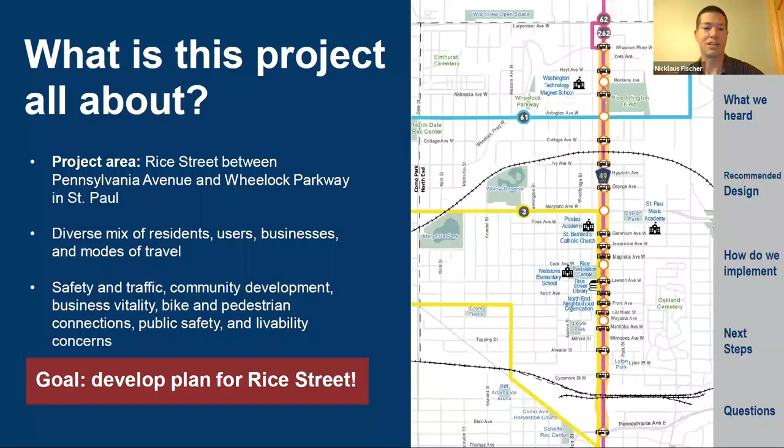So we have lots of other goals: public safety, improve bicycle safety, promote community investment, promote healthy community, maintain transit service - both existing transit service and plan for a future BRT, bus rapid transit out here - provide business support, enhance pedestrian safety, create an inviting environment, promote economic development, workforce development, and improve vehicle safety.

So our project timeline - what's been happening? We've had lots of public engagement over the last few years. Tonight we're kind of wrapping up our preliminary design, trying to get towards the end of that. Our next step is to come up with an implementation plan - how are we going to build it, when are we going to build it - and start final design in 2022 and beyond.

And I'll pass this off to Haila to talk about what we've heard. Thanks, Nick. Again, I'm Haila Maze with Bolton and Menk. I'll be covering the engagement section.

As mentioned earlier, extensive engagement has been an important part of this process. We're all glad to hear from you today because this process has been ongoing for some time, and it's not anywhere near done yet in terms of the conversations. My job today is to tell you what we've heard so far, what we've been doing so far, and how we're looking ahead.

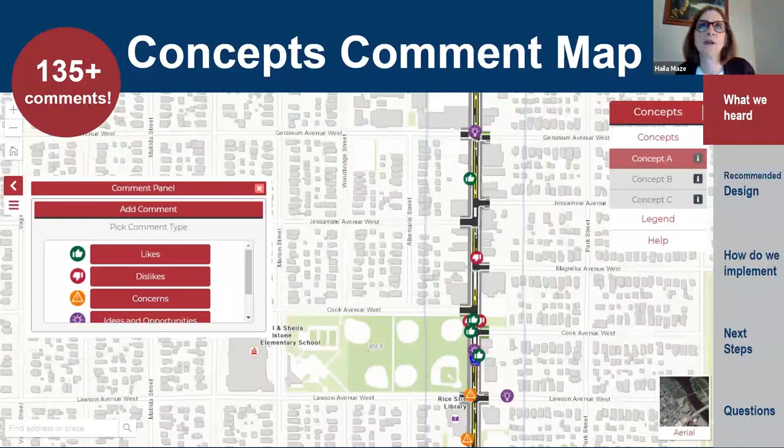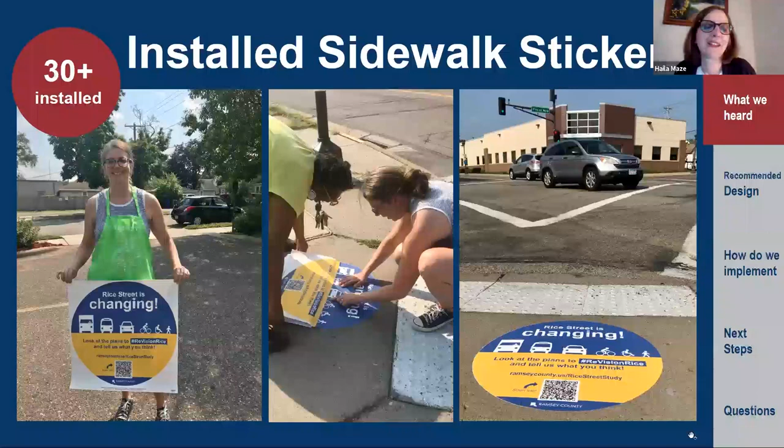We've heard over and over from many different people the importance of high priority pedestrian and traffic safety. People have a difficult time crossing this road, either by vehicle and especially on foot, and are concerned about others doing the same, especially children in this area. That is a priority, and we recognize it as such—it already was a priority. It's even more so after talking to people who have to navigate this road every day and feel unsafe doing so.

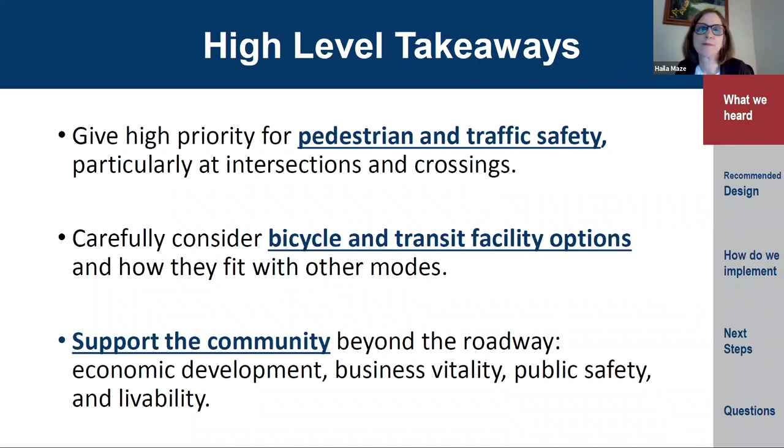Next slide. Just mentioning this to reiterate, as we're transitioning to the next stage which Scott will talk through, is how this informs the project. You'll see, as we hear about the concepts, how pedestrian and traffic safety improvements have been integrated throughout in a lot of different ways—reconfiguration of the roadway in terms of lanes and space, enhanced crossings including some restrictions to make it safer for people to walk and bike across, and bike and transit options and enhancements, including dedicated bike facilities and improvements to transit.

One great addition that happened midway through our process is that the BRT, the G-Line project for Metro Transit, was announced for this corridor. It's on a little bit different time frame, and this isn't replacing the project that will follow, but it certainly gave us an opportunity to start folding in conversations around that and around people's aspirations for improved transit here, and community support in general. We heard a lot about implementation and partnership approach beyond the roadway, and have had a lot of parallel conversations since then with key stakeholder agencies and community organizations who care about these issues.

Again, we're not here to be the solution for public safety and livability in the community in general. But we recognize that if we're not talking about that and not being authentic about it, we don't fully understand where the community is either. And that goes for many topics.

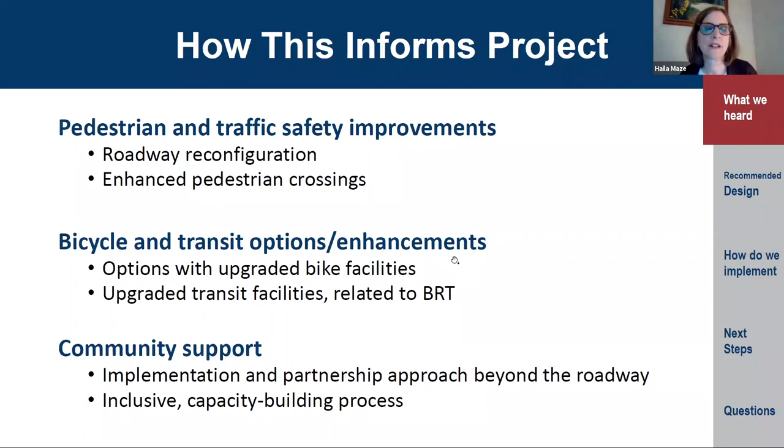But as Haila was mentioning, we're bringing along community context goals—things we heard from the community. How do the various concepts affect economic development and business support? How are the people who live around here and want to be employed affected by this project? So, development of workforce and employment, the health of the community—are we providing a safe, healthy environment for people to work and live in? And then, as Haila mentioned, the public safety element—it's not just about traffic safety, but public safety holistically. There are also some community-defined goals we heard from you all throughout this process that we're weighing these concepts against. So, next slide.

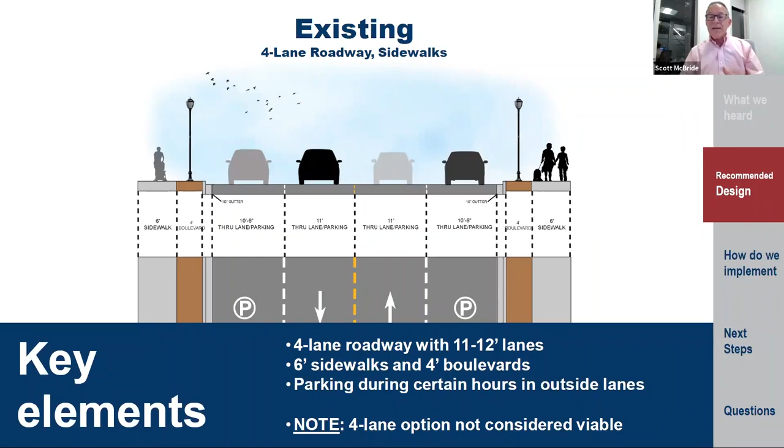The important thing to take away from the existing conditions is that as we analyzed safety, traffic, and a number of factors—due in large part to the crash history out here—we do not think a 4-lane undivided roadway like this is a viable option. So when you look at the 3 alternatives we brought out to the public in July, none of them have this 4-lane design. If you'll turn to the next one, Nicole...

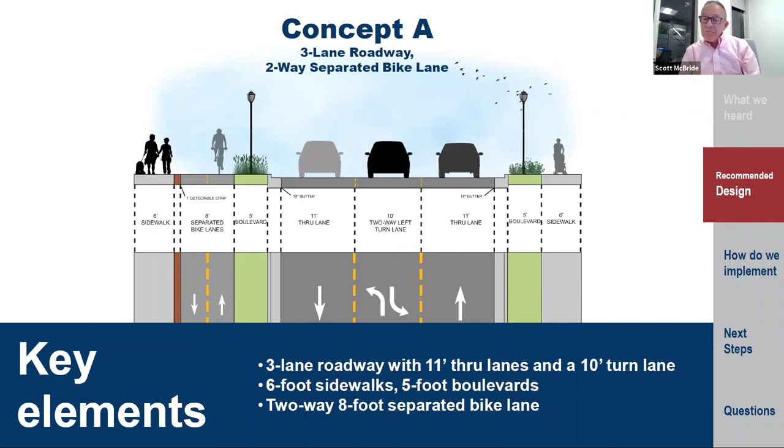This concept B is also a bikeway alternative. Starting on the left side, there's a 12-foot shared use path. So it's not the separated bike facility that you saw before - it's a shared use path available to pedestrians and bicyclists alike. And again, it's the same roadway width, a three lane section in the roadway.

On this one, we're able to get a slightly wider boulevard or flex zone area on the west side, 6 feet. On the east side, we're able to get a bit more as well - a 6-foot boulevard and a 6-foot sidewalk, for 12 feet of total width there. I don't want to be a spoiler, but this is the option we're looking at - I'll dwell on that a little bit later.

Concept C was considered more of a pedestrian alternative, so there is no bike lane on this alternative. It's pretty symmetrical with a 7-foot boulevard, a little bit extra boulevard, and an 8-foot sidewalk - 15 feet of total space on both sides of the road. The sidewalks are allowed to become a little bit wider in that alternative.

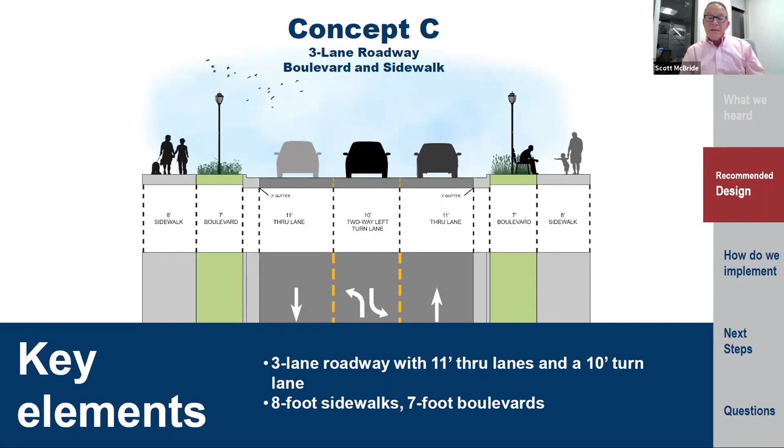Let's talk about our preferred recommended concept, and that is concept B. It is a bikeway alternative, and I'll get to some of the whys on why we chose this in a minute. But first, I thought it'd be good to remind you, and then take a closer look at what this looks and feels like.

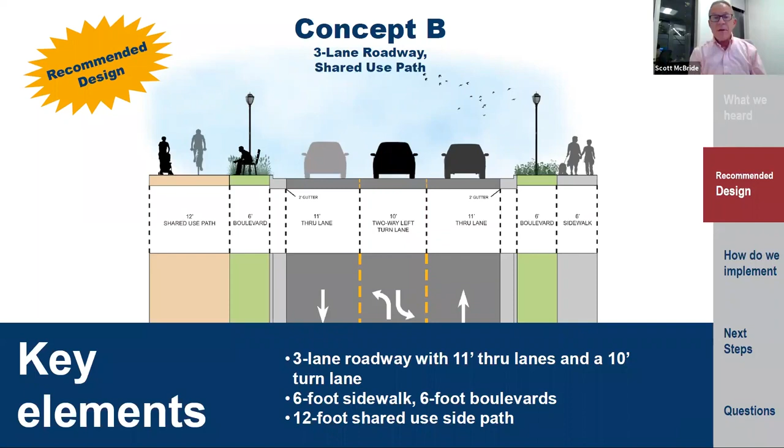Again, this is a 12-foot shared use path with a 6-foot boulevard on the west side, or left side you're seeing there, and a 6-foot boulevard and a 6-foot sidewalk for a total of 12 feet on the east side of the roadway. The shared use path is again available for pedestrians and bicycles to ride on.

Now let's talk a little bit about what this feels like. What I'm going to show you now is just a handful of really draft artist renderings. I will say that we are at about 5% design right now, so many decisions are yet to be made. We don't want to say that any of this is set in stone yet, because it's not.

We're looking for feedback from our constituents, from all of you out there, and that's really important to inform this process. So what I'm going to do is walk through a couple of spots here and show you different kinds of treatments that we can put out here, and some that we're suggesting be put out here.

So in this rendering, you see the observation point there. We're between Hyacinth and Ivy, looking north toward Ivy, and you can see some of the features on there, the New Horizon Academy and the Hmong Elders Center.

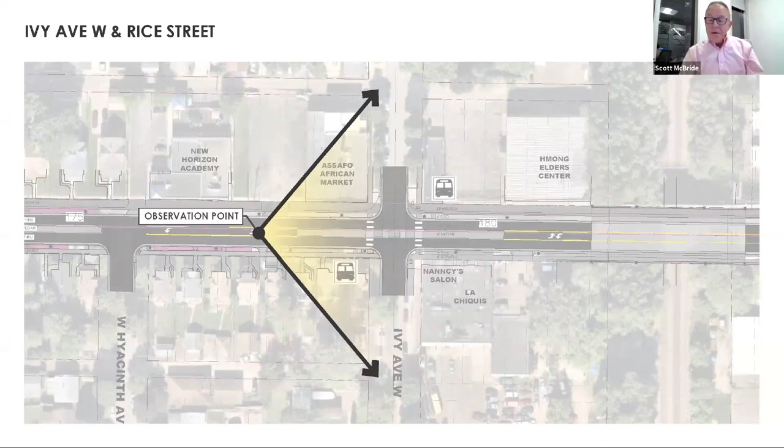If you go to the rendering, what this is showing is an example - that's a great question from Kim O'Brien, I just saw that pop up.

This is an example of where we would turn that center turn lane into a median for various reasons. At Ivy Street here, we're actually showing that median going all the way through Ivy Street, so Ivy would become a right-in, right-out situation.

You could not cross at Ivy. What the median does is a couple of things. One, it helps to slow traffic, having the median in there. And two, it creates a crossing opportunity for pedestrians, where they only have to cross one lane of traffic at a time, have refuge in the middle, and then look the other way and cross the other way. So this is an example of how we can take a median through a street and create a right in, right out situation on Ivy.

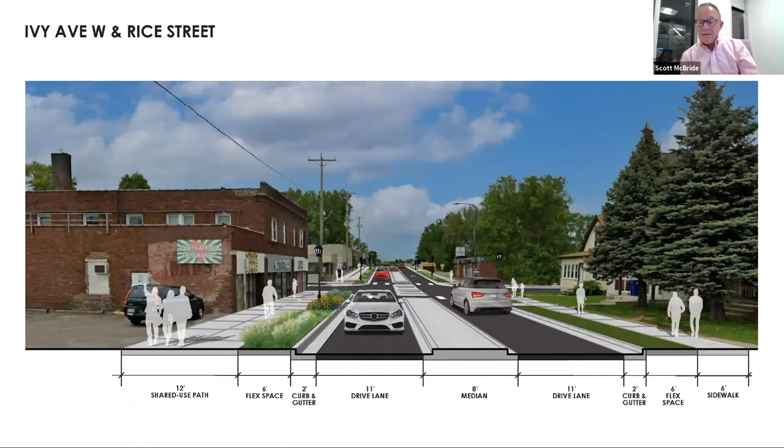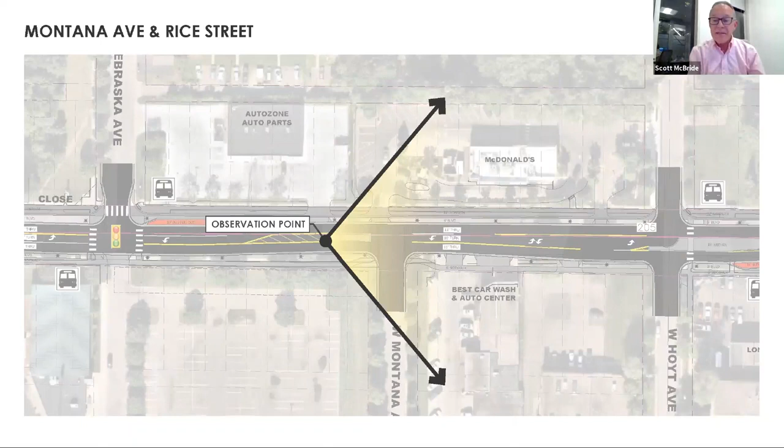Next. So this one is looking at Montana. We're right between Nebraska and Montana, closer to Montana, looking to the north where the McDonald's is. This is an example of a partial median, a pedestrian refuge median. We still show the left turn lane in the southbound direction, that'll get you to Nebraska, and you are able to come in and out of Nebraska there. But there is an island there that allows a pedestrian to come across and have refuge. So it's an example of a pedestrian median that we'll have sprinkled throughout this layout.

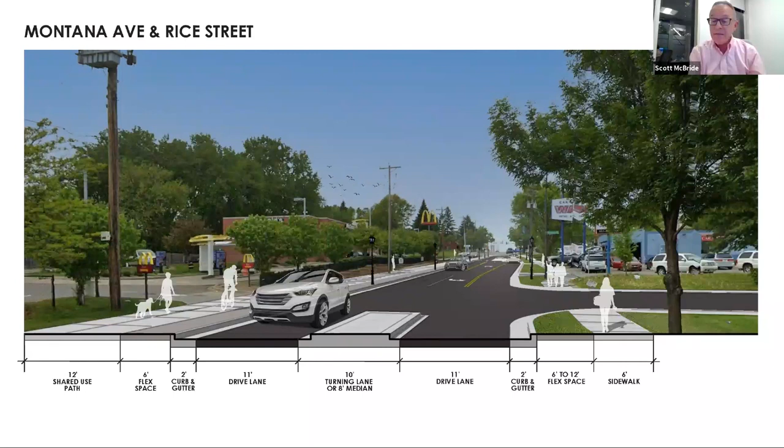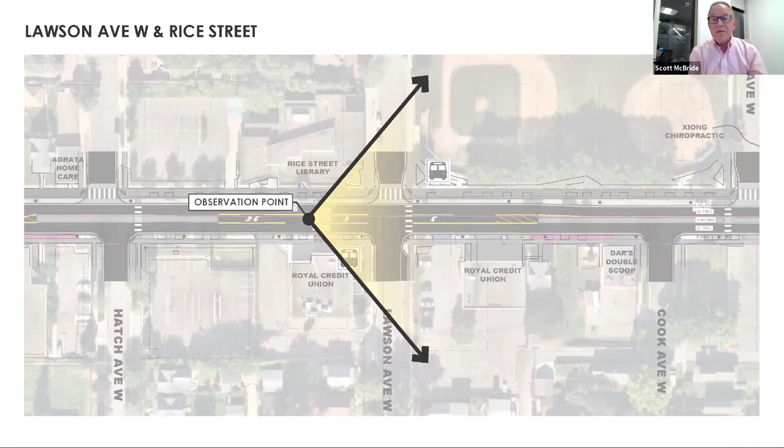The next one. So this is one that we wanted to show because of our partnership with St. Paul Parks and the new rec center. This is at Lawson, where the new rec center is being proposed. We're showing just a ghosted out view of where the future North End Community Center will be. This one still has the left turns in both the north and south direction. So this shows what it feels like without that median in there, but with pedestrian crossings in there.

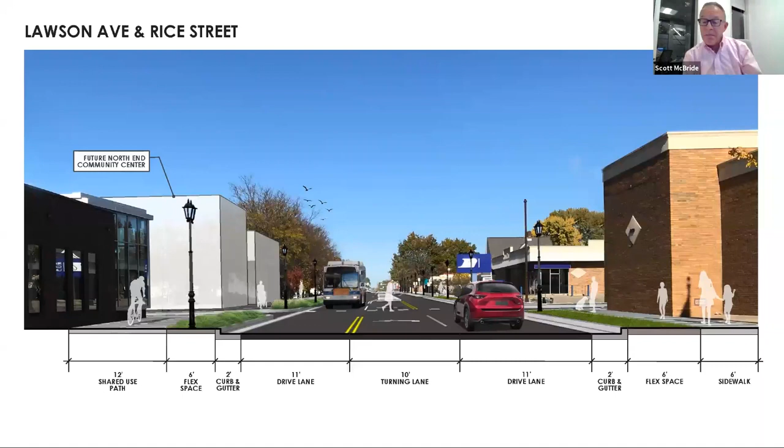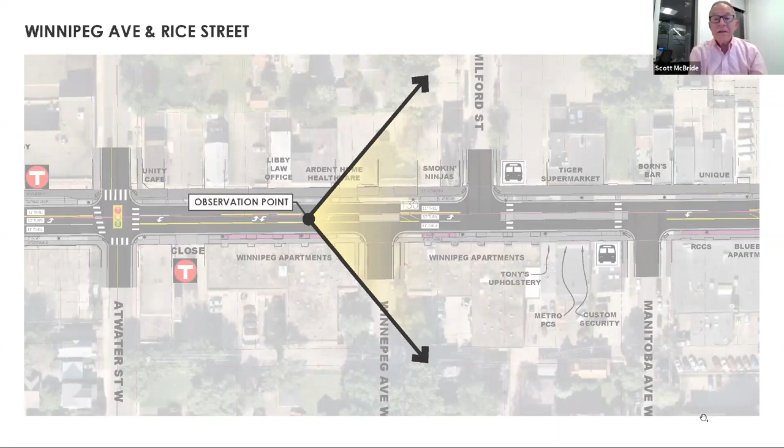Next. And so this is more on the south end down at Winnipeg, looking north. We wanted to show this because it's an example of that tighter commercial part of the corridor where everything is pretty much building. The right of way is building face to building face, and you can see the shared use path on the left side. The flex zone here is in paved condition. We do have a median across there, so it's just a little bit tighter kind of an area that shows what the built up area looks like on the south end.

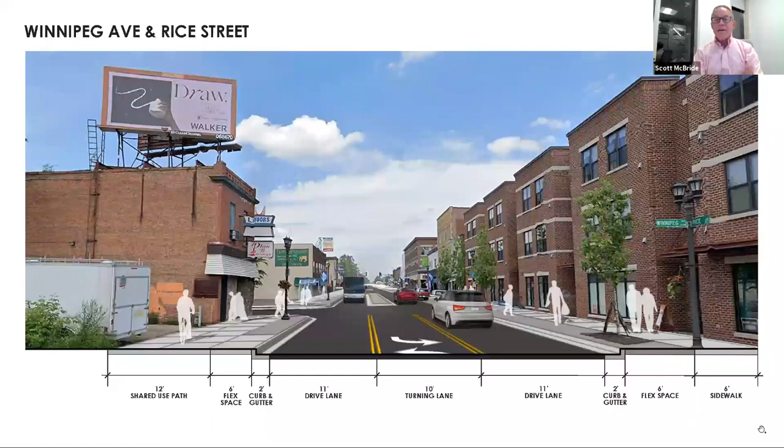Mentioned earlier that I'd come back to why concept B. It really addresses the county and the city's modal priorities, where it prioritizes bike and pedestrian accessibility over auto accessibility. It does have a new dedicated bike accommodation, and it's worth noting that the bike is shared with the pedestrians. If you go back one slide, you'll see it can be pretty close to some buildings as well, right up against buildings. So we're anticipating that this would function as very much a slower kind of bikeway, as opposed to a separated, fast commuting bikeway. The bikeway in this space would be considered really access for locals, to local businesses. Not that you can't commute through, you can, but it's a slower, more calmer type of bikeway facility. In addition, we are also improving pedestrian access and crossings across this area as well. So there's a lot to like for bike and pedestrian accessibility here.

When we thought about whether we should do the separated facility versus the shared use, one of the things about concept A is it's just so tight that all of the elements, the sidewalk, the bikeway, the roadway, are all down to their very tightest minimum configurations, and it feels very constrained in there. This one gives us a little bit more flexible space, things that we can do in the public realm, like greening, green infrastructure, streetscaping, art, a number of different things. It's a little bit easier to maintain, but there's a lot of conversation yet to go to figure out what we're going to include out there and how that's going to be maintained, but we're cognizant of that.

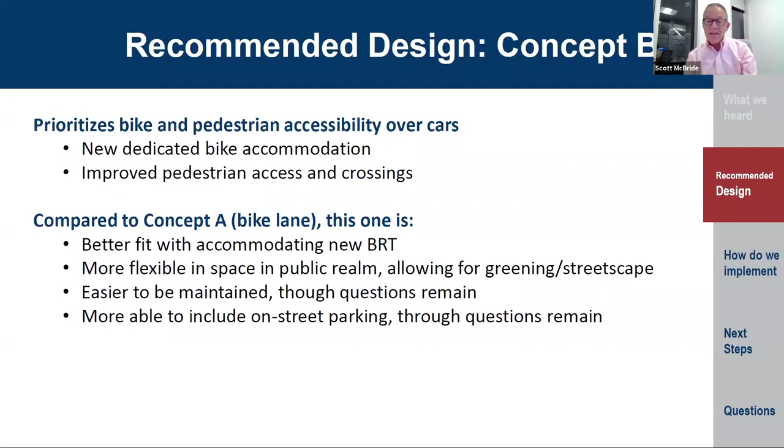Next slide. I mentioned one of the pictures I showed was at Cook Street, where we showed a median going through. So we're proposing, as kind of a first cut at this, the potential for those medians across these roadways at Winnipeg, at Hatch, at Cook, at Rose, and at Ivy. So when we get to the part about online engagement, we'll have a map that shows all of these that you'll be able to comment on.

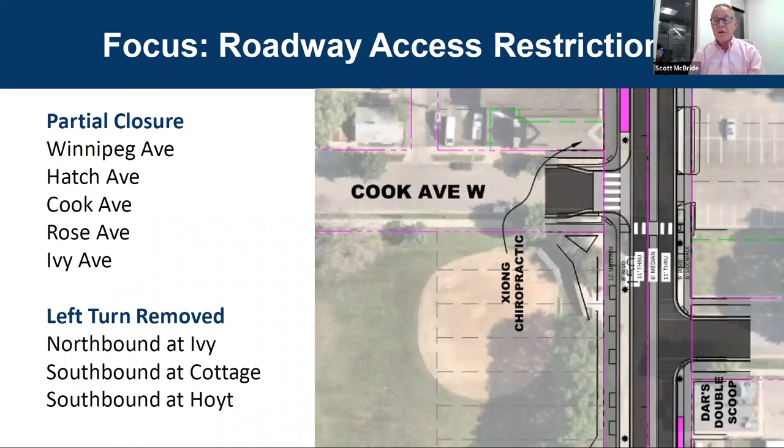Next, I did want to just touch briefly on the BRT project. One of the things we've worked with all along here is we're a little bit ahead of Metro Transit's BRT process. They just found out not too long ago that the G line is slated to be implemented. I believe it's only partially funded at this point.

The year anticipated is 2025 to 2030. So somewhere in that time frame, this would be implemented, and we'll be a little bit out ahead of that. You can expect to see Metro Transit start their engagement process for the G line within the next year. So that'll be happening. However, we are making sure that we're accommodating of that.

Right now, Metro Transit is anticipating stops at Larpenteur, at Arlington, at Maryland, at Front, Sycamore, and these are all just proposed at this time, until Metro Transit comes in and engages the public, does their process, and works through it. So we are accommodating those and working very, very closely with Metro Transit throughout this process.

So this is a great thing for Rice Street, to be able to have infrastructure improvements like Ramsey County is proposing, coupled with this transit improvement that Metro Transit is proposing. Next slide.

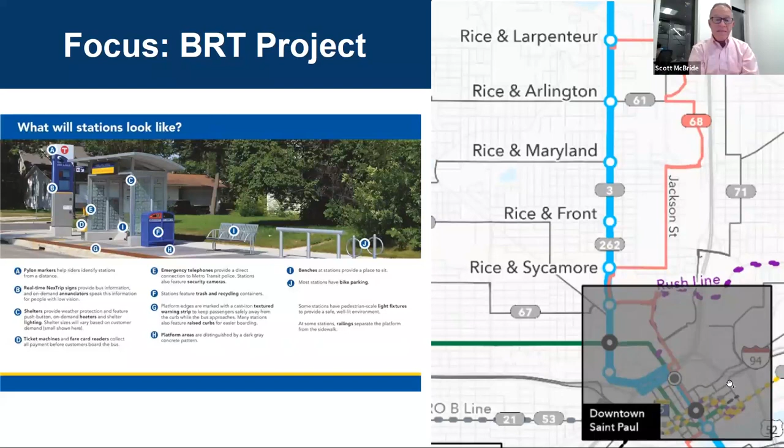So a few considerations here as we start to work into the implementation portion of this. One of the tenets we want to put out there is we don't want to disrupt the whole roadway all at once. It's a 2-mile long stretch, and we want to minimize disruptions to businesses and travelers. Construction is a disruption. We fully understand that.

We want to focus first on the areas that need the biggest change and work in a really systematic way through the corridor so that we can try to minimize those disruptions to both businesses and the people who use the corridor. Also note that the design, as we go through the corridor, can be flexed by the roadway segment.

I mentioned earlier, if you recall, the Winnipeg rendering that we had. It's very tight in there. The buildings—we'll have a few design considerations in there that are specific to that area. As we get, for instance, on the north where it opens up a little bit, you've got more off-site parking, better sight lines. We'll be able to do different design elements and touches up there that will vary.

So we're able to flex that throughout the corridor, with differences in need for on-street parking as well. Where the commercial corridor, let's say around Maryland to the south, is very commercial, there's a little bit less off-street parking, more businesses right up against it, more need for parking. When we get to the north, there's a lot of parking that's off-site.

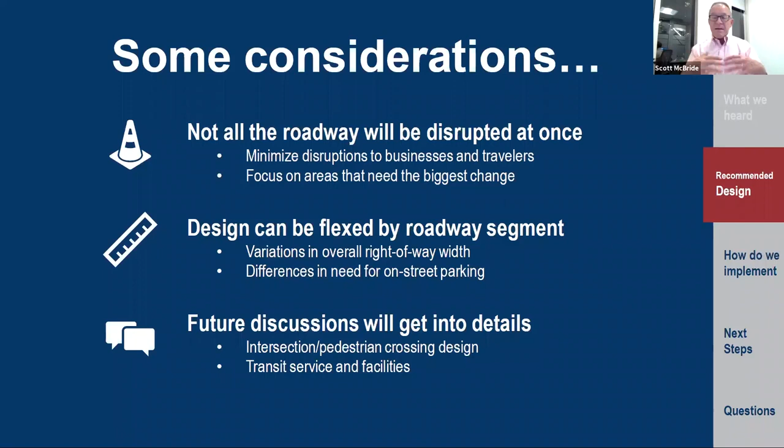So there's a lot of differences, and we can flex that parking demand and parking design as we go through this. The future discussions we have will really get into the details. We've got concept ideas at a higher level now for how these intersections and pedestrian crossings will be treated. But as we get into design and really start peeling back the onion, we'll get into real details about what works and what doesn't, and do that along with the community and along with the agencies that operate this.

So there's a lot of design to come and a lot of detail to come within that design. As I mentioned earlier, very close coordination with Metro Transit on both existing transit, local service today, and a future BRT facility that will come through. So there's service to be thought about, as well as the facilities that we put on the ground out here.

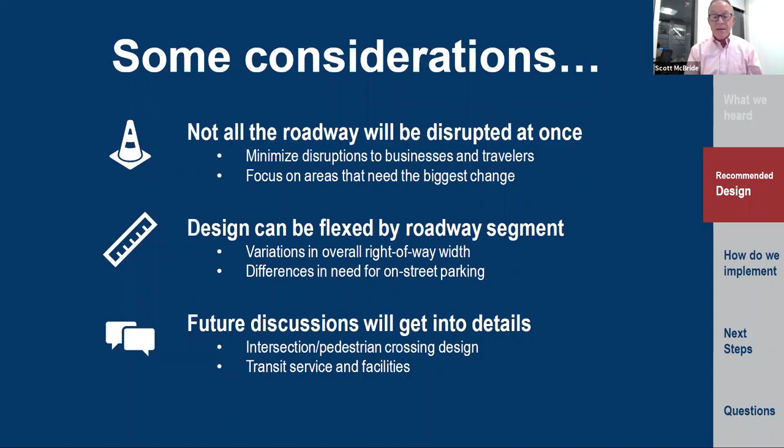So I mentioned earlier that we've got two sets of goals that we're bringing along: one transportation, and one is livability.

What does it actually look like? What's the public realm look and feel like? What's the place that we're creating out here as we change this? How can the neighboring businesses and residents actually benefit from this project as it goes through?

Is there work to be done that the neighborhood can do? And then how can we enhance health out here? Not just safety, but actual health and safety of those people that use this corridor. Again, not just automobile users, but everybody around the corridor. So that's public safety from a bigger perspective.

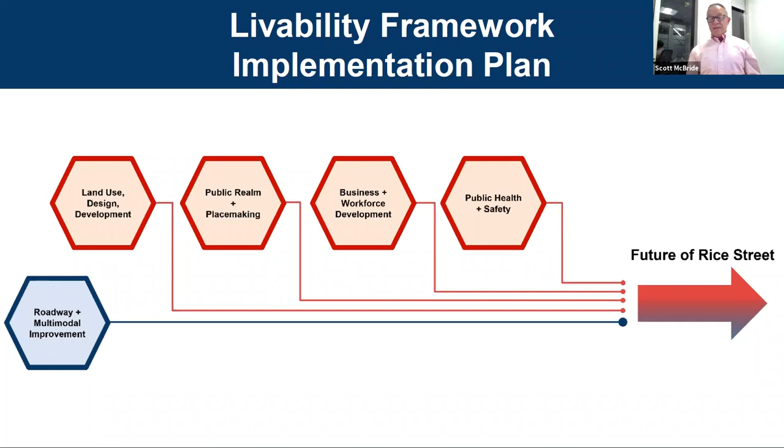So that's the presentation we wanted to bring you through, and now we want to go into breakouts. Here's how it will work: we will select a breakout for you, and you'll be able to click a button and go to a breakout room. Each breakout session will be facilitated by one of our staff, and we'll also have somebody there helping to take notes as we go along.

It's intended to be just a dialogue about what you just heard. What questions remain? What questions do you have about this? Do you like the choice that we made? Do you not like the choice that we made? We're open for a conversation about this.

After the breakout sessions, we're anticipating just about 10 minutes for that. We'll do about 10 minutes of breakout, then bring everybody back together and have a short report out, just a couple of minutes per session, on what happened in that breakout session.

And then I've got just a few slides left about implementation, so it'll be probably just another 5 or 10 minutes of going through how we anticipate implementing this process. So Nicole, any other instructions we should give people, or will we just magically disappear?

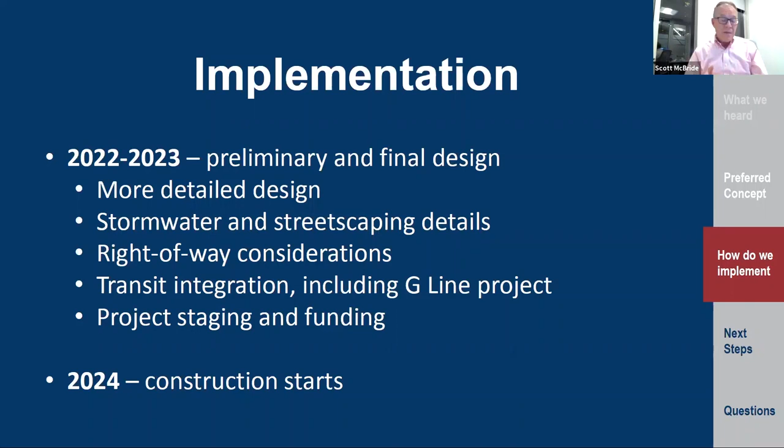We will be putting a recording of this conversation online, along with a copy of the presentation. There will be more resources coming — you'll be able to see cross sections, and the visualizations we showed today will be on there. So there'll be a whole suite of information you can look at and engage with on your own time, at your own speed, coming back as many times as you want. There'll be a lot of resources available to you there.

This is the big picture of what I just got done saying. We'll develop that project implementation plan with feedback from you. We will continue to engage people — the county's committed to engagement all the way through construction. There'll be continual engagement through the end of this preliminary period, through the next design phase, and through the construction phase. The next step is to move into implementation.